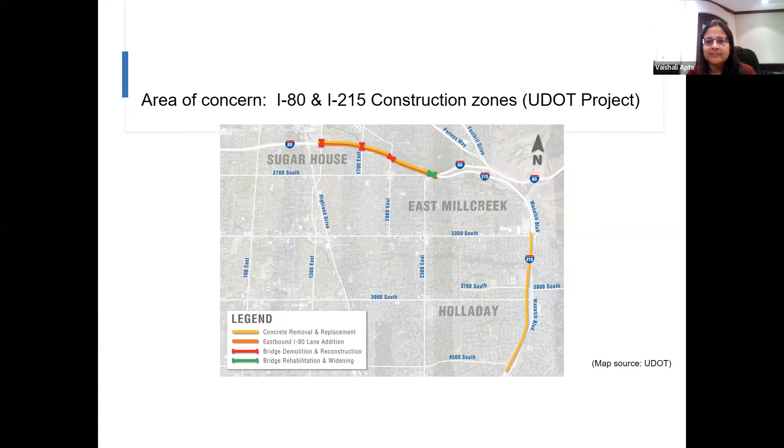This video is taken around noon, but during morning rush hour, evening rush hour, when it's darker, it's a lot harder to see.

This is just a quick summary of some of the important factors making this dangerous. Speeding in the construction zone - there's a lot of signage that the construction zone is 55 miles per hour, but drivers are traveling much faster than that. There's insufficient lighting.

There's really no lighting on the main line, it's mostly just at the ramps. We talked about the geometry of the road, the darkness, the fact that there's no reflectors, because reflectors which are used in places like Florida would just get scraped off by snowplows. Also, I think this particular area - and I've only been here for part of one winter - seems like it's a transition area between rain to snow, and it's just very hazardous.

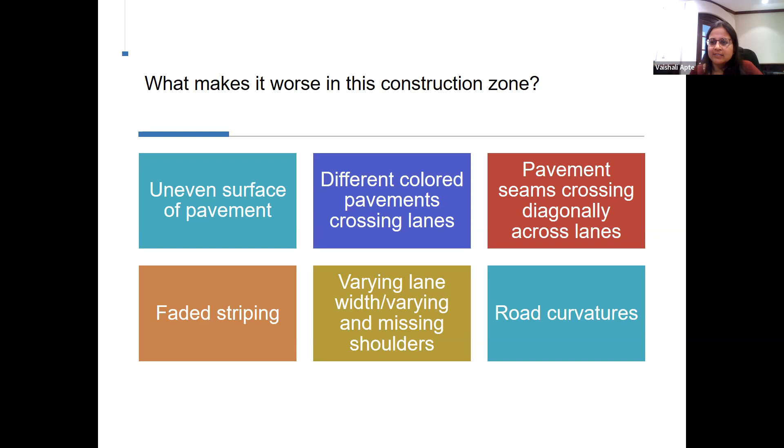Another example. So why is this such a big safety problem? Just a couple of weeks ago there was a pretty major crash, lanes were closed. This area is obviously dangerous for drivers if there's a crash, but it's right next to where a lot of workers are in the construction zone. That's extremely dangerous - there's just a concrete barrier separating them from the moving traffic.

The other thing is, I think a lot of cars - my car doesn't do this, but I think a lot of cars are starting to use lane sensing technology. I don't know how they're able to sense the lanes when you can't even see them. There's a lot of talk about future technologies for autonomous vehicles, and if they can't detect where they are, that's not going to work.

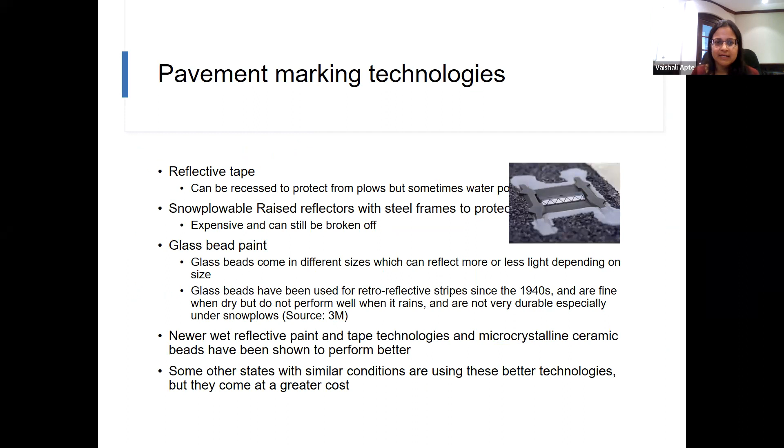These are just some different types of technologies - tapes, reflectors, different types of beads that are used. There is a study underway, a 3-year study that UDOT started last year, where they're looking at the different types of striping.

The I-80 and 215 project is scheduled to be completed late 2023, so this study won't be done by then. I strongly suggest they use whatever early results they have and implement them instead of waiting for the study, because by then construction will be done and it'll be too late.

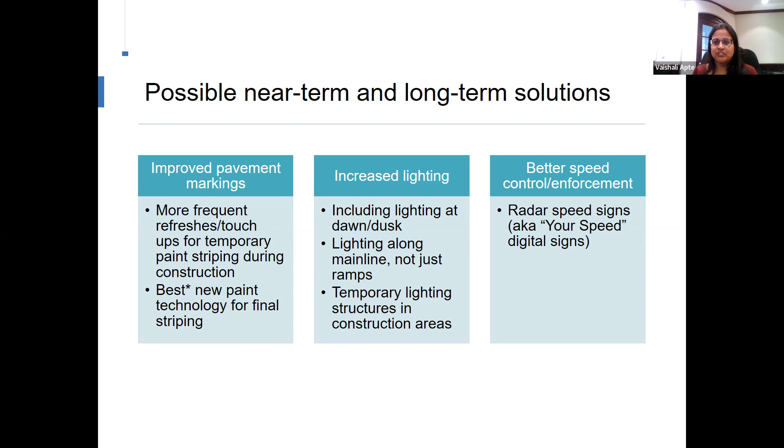So just to summarize the solutions: more frequent refreshes and touch-ups using the best possible technology for the final striping, increasing lighting across the whole roadway, not just the ramps, maybe putting in more temporary lighting, and also some better speed enforcement. Those are my suggestions. Thank you.

Very different project. This is one of the great things about these projects, the diversity of ideas. So GJ, I know you have at least an engineering background. Do you have some thoughts about this particular project you can share with us?

I do. The texture, which I assume means the profile of the roadway under construction, grabs the inside of your tire and kind of startles drivers. It's key, especially if you're an insecure or new driver, and then you've got people coming at speeds way beyond the construction zone limit. I think that's a key part of this. The autonomous vehicle suggestion, that everybody seems to think is the solution for the world, you know, the Elon Musks of the world - but there's never a roadway that's not under construction at some point.

And so if the autonomous vehicle technology doesn't take advantage of that, it's worthless, the automated drivers.

My last one was, do you know anything about how effective the fines are, doubled for speeding in construction zones? There's signage that says fines are doubled, and I drive this route back and forth twice a day because I drop my son off for school, and everybody is speeding. I have never seen anybody getting pulled over. I saw somebody pulled over once, but the highway patrol person started following them on I-15, way before even getting onto the construction zone.

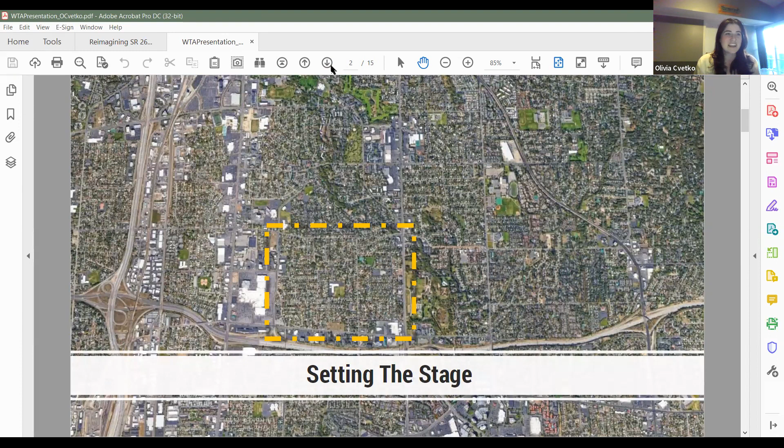So here is that same view, but I'm just pointing out a few key things in the area. You can see it's got a regional shopping center on the west side, Fashion Place Mall, lots of commercial running north to south, some commercial along I-215. There's an elementary school within the boundary, and on the east side is Wheeler Farm Regional Park, run by Salt Lake County, which is a great amenity for anyone who lives in the area. I love it. Next slide.

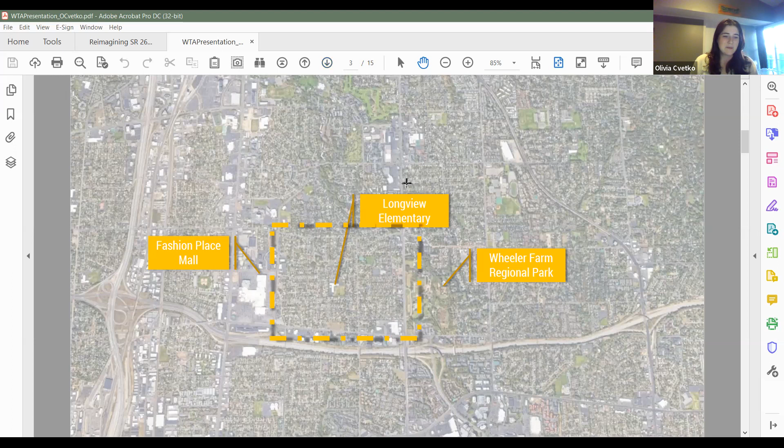Before I dive into the issues, I want to talk about who lives in this neighborhood. People in this census tract spend on average 22% of their income on transportation, which is about average for the Salt Lake area - a little lower than the greater MPO, Wasatch Front Regional Council, who spend about 49% on housing and transportation combined, where this area spends 45%. But only about half of households in the city live within a 10-minute walk to a park, compared to about 70% in Draper and 60% in Bountiful, some nearby comparable cities.

Next slide. Okay, and lastly, I wanted to give a little snapshot of who lives in the area - what's the demographic like?

So you can kind of see the neighborhood drawn in the top left corner. I think the key stats here are that the at-risk population list shows households with disability, population over 65, and households with no car. I'd also like to add into that list, for the purposes of my presentation, that chart on the bottom left, population under 18.

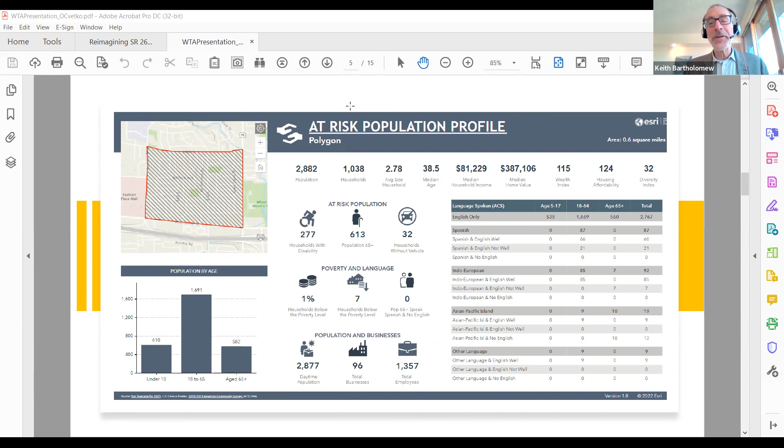I know this is amazing, but you're at 5 minutes now. Okay, all right, I'll go through a little quicker.

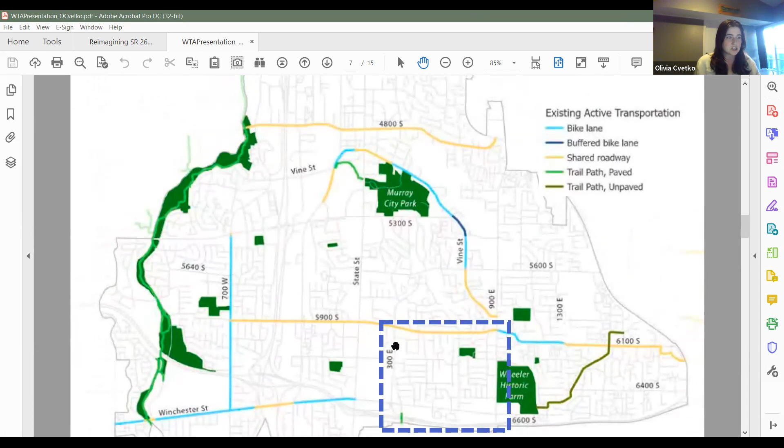So, current conditions, we can go to the next slide here. I moved to this neighborhood with dreams of Sunday walks to get boba tea at the mall and adventures at Wheeler Farm. As a new mom, household with a little baby, it's a little scary to cross some of these roads. So you can see here, this is a map of existing active transportation—not much in the project area.

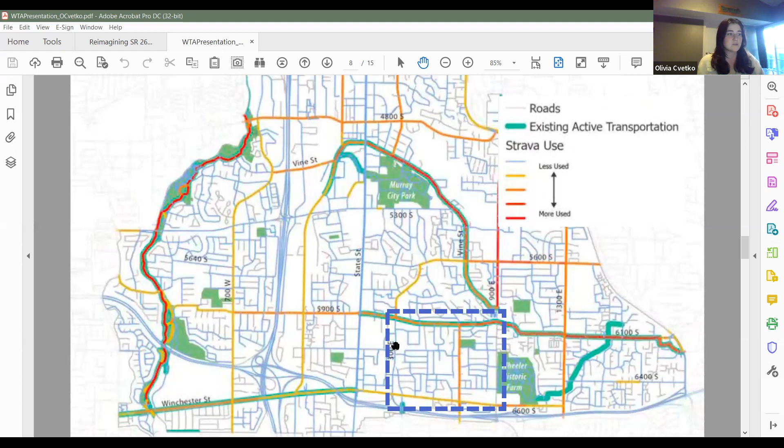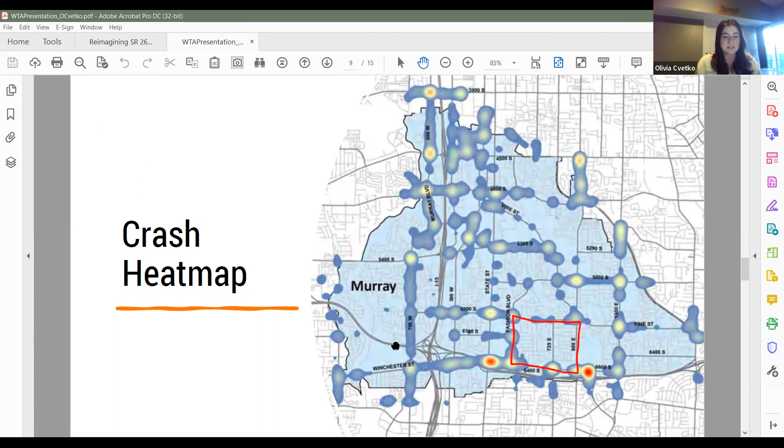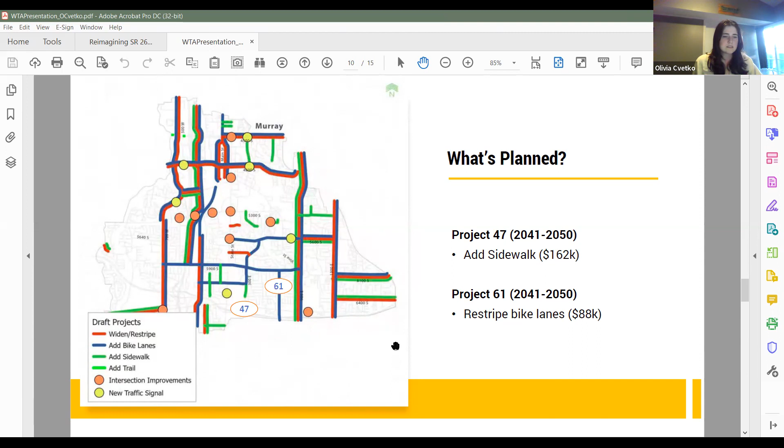So next slide, I wanted to point out what the city is planning. Murray just did their 2019 transportation plan, which unfortunately I didn't participate in because I didn't live here quite yet. There are 2 projects in the area planned for about 2050, so pretty far out—a new sidewalk on that little green stem by number 47, and restriping bike lanes through the middle of the neighborhood.

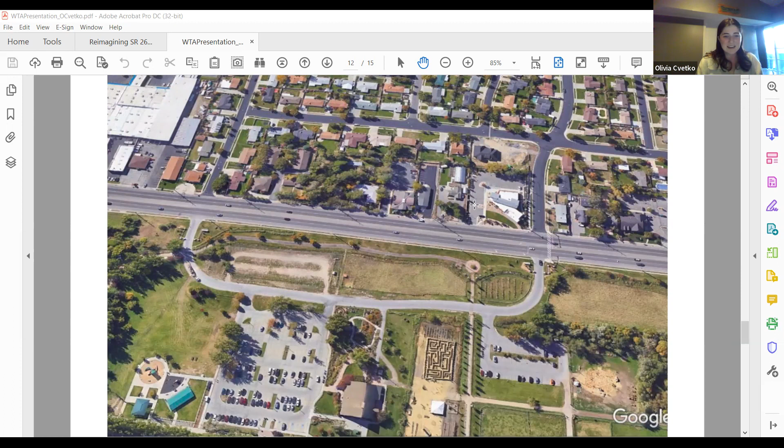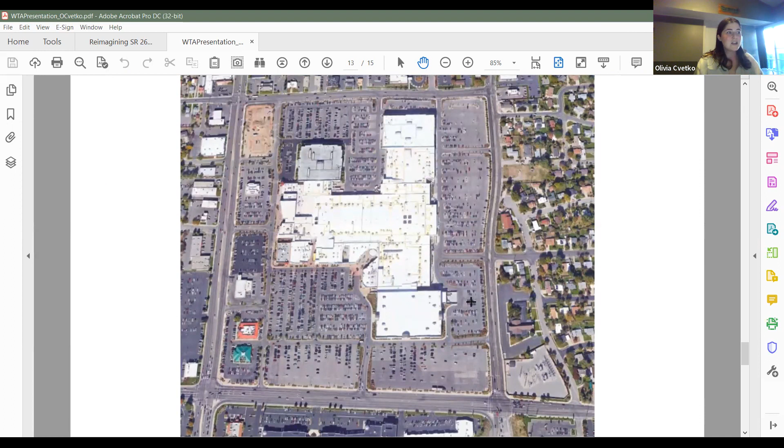Here is Fashion Place Mall. You can see my neighborhood on the right, Fashion Place Mall on the left. That access point in the middle is frequently used by a lot of my neighbors—there's always little old ladies with their purses walking across this very scary road, no crosswalks in sight. And if you go to the next slide, you can actually see that there are sidewalks around the perimeter of the mall, but they don't even dip into the mall. They have all this beautiful landscaping, but it's not very safe. So that's my trouble with all these great amenities that are not very accessible.

Some of the barriers to accomplishing this: one that's not listed is that the city just did their transportation plan, and those items are not listed in it, unfortunately. Another one is UDOT-owned right-of-way can be a serious challenge, including coordination between city, state, county, and private property owners with stakes in parking, right-of-way, all of these things. Funding is a big issue—if any of you saw on my slide showing planned projects, they were pretty pricey just to add a sidewalk and restripe bike lanes.

Funding's always an issue, and of course, loss of our precious parking space, taking up space for people who want to walk to the mall or around the mall. And that is my conclusion.

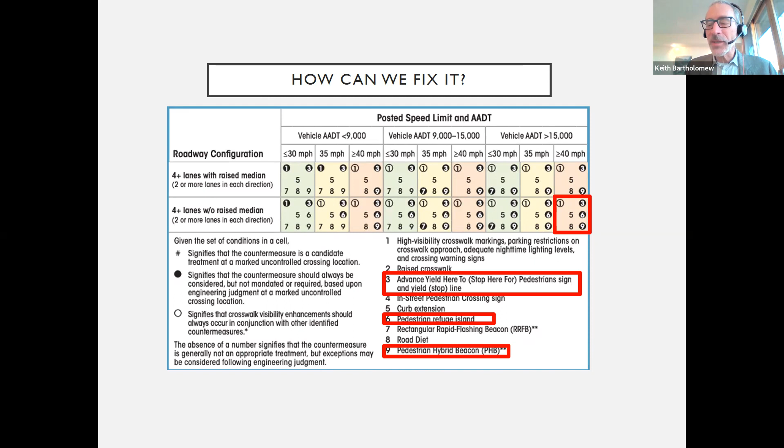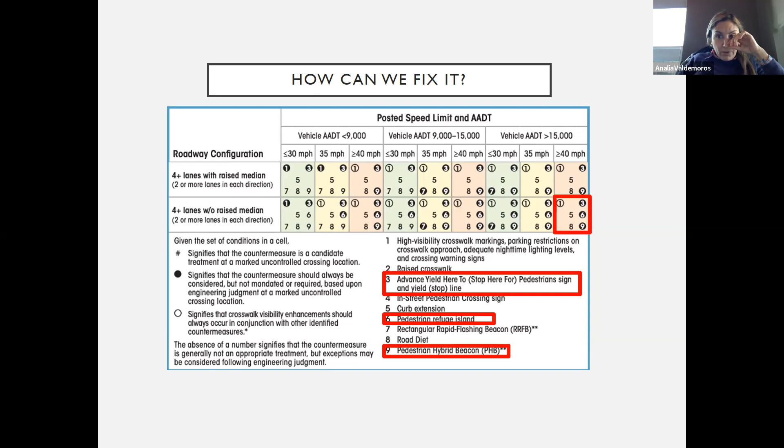Councilmember Valdemoros, this is your district. Yeah, it's in my district. I used to walk that intersection when I wasn't a planner. I used to live on 7th East and 3rd South, so I used to go to that corner quite often. I didn't have a car when I was a student. It hasn't changed, obviously, and that was 15, maybe 18 years ago.

I don't know how much it costs for that light timer, but we have Tom here, he might know. And hey, budget season is coming up, Tom, so you can always put in a request that we do that.

The council is interested in reducing speed limits in general in our city because of this very reason. Obviously, you mentioned this is not a city street, but regardless, whatever we can do, I'm happy to lobby the rest of my council members to support something like this, because that intersection is tough.

There's also a lot of elderly people living in that area because of those apartments, so it would help. I actually asked people if they drove at all, and about 30 to 40% of my results were people who didn't have a car or didn't drive. A lot of them were students, but a lot were older people as well. Tom, I don't know if you have a number you're familiar with, but that's my offer to you.

Olivia, thank you for making it so simple, but thorough and understandable. It's an easy sell, at least for me. Yeah Olivia, I'll put something in the chat for you.

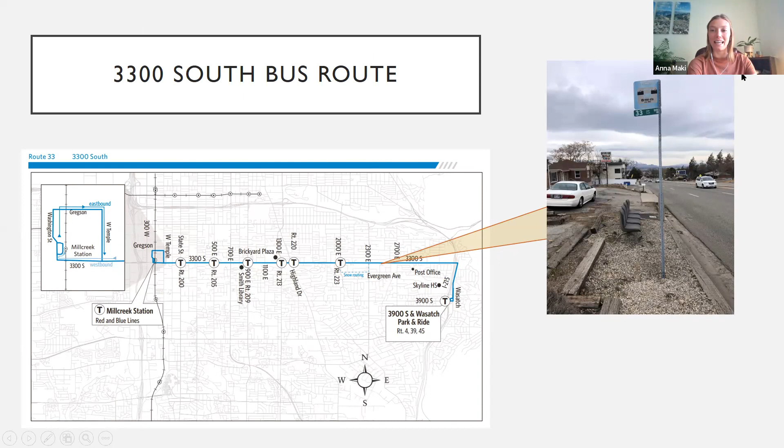Next slide, and these videos you can go ahead and play them. This first one, oh okay, the second one shows me walking east away from the bus stop. There's no separation from a lane of traffic. I promise I did not stop in the middle of the road. This one shows me walking towards the bus stop. Both show really good examples of how inaccessible this location actually is, and this is a pretty extreme example. Not all the stops are like this along 3300 South, but it shows that this is not ADA accessible. It's not accessible for people with strollers, and it's not even accessible for individuals who are uncomfortable with that low level of separation from traffic.

Next slide please. So Millcreek has a couple of master plans that actually address wanting to have better connections for all modes of transportation. They have the city center master plan, their general plan, and the transportation plan.

Even though they address a desire to support all modes of transportation, the only strategy they really put forward is bus stop amenities, such as seating and lighting, which is valuable, but it doesn't actually get individuals to the bus stop safely.

Using a couple of recommendations based off of the Life on State project, UTA, WFRC's connectivity guide, and various other resources, I came up with a couple of strategies that would work really well in this area.

Mid-block crossings with HAWK beacons, those are the ones that stop traffic in each direction. Pass-throughs are pedestrian walkways through neighborhoods that shorten connections to destinations. Wayfinding signage, curb extensions, that's the picture in the lower right hand.

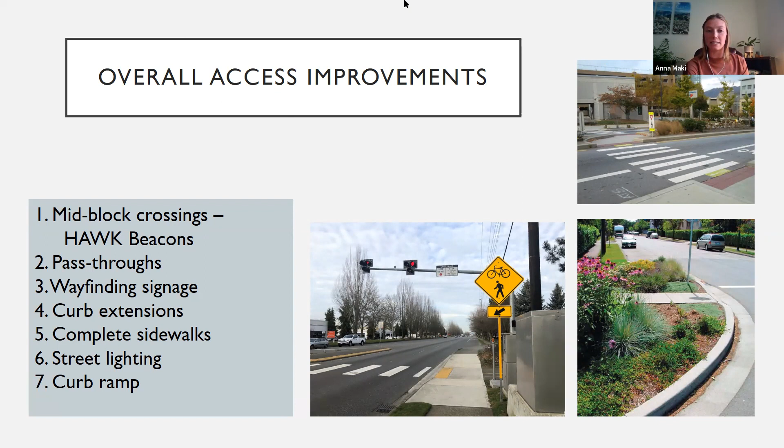One of the spots that could use one of these recommendations is the Smith's on 3300 South. There's a bus stop located right next to the McDonald's, shown in the picture on the right-hand side. There's an existing crosswalk from the neighborhood on the south side up into that commercial area that's heavily used, including an REI, but there's no crosswalk from where the existing crosswalk drops you off to the actual bus stop itself.

This is also an area with fairly high usage. In February of this past year, 22 individuals boarded at this location and eight individuals left. So not only do they have no place to go once they get off, they don't really have access to those businesses. I'd recommend putting in a pedestrian pathway, even if it's just a colored pavement type pathway, to get to Smith's and those other commercial businesses.

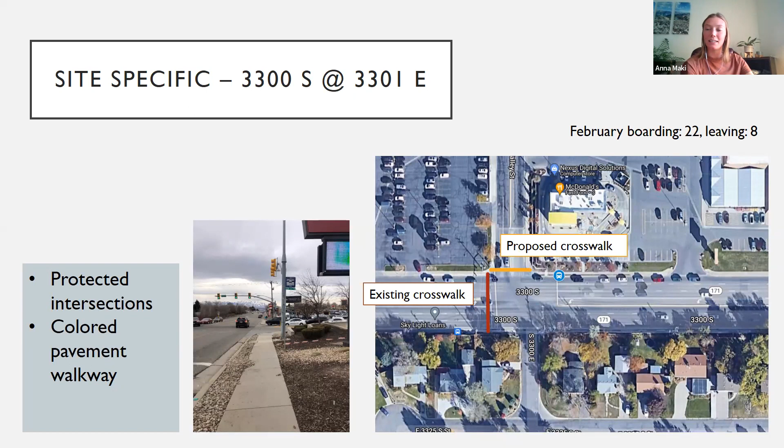Another example is a spot along 3300 South that doesn't have a sidewalk, and that's probably shown by the really low February usage. There were zero individuals who boarded in February and January, and one individual alighted at this location, which is interesting because it's surrounded by a lot of neighborhoods.

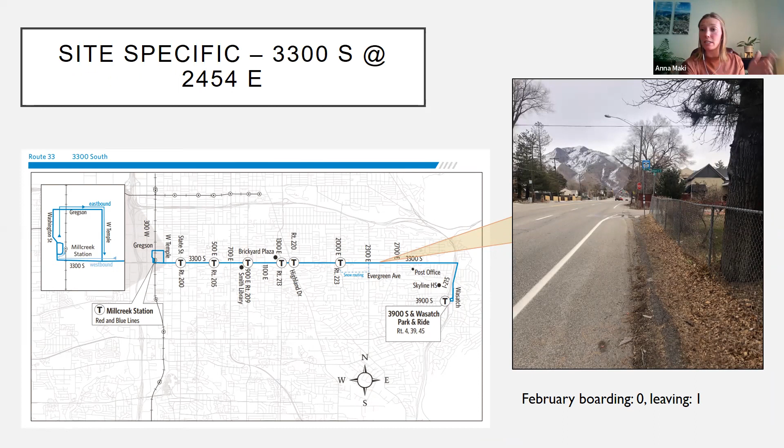My recommendations would be to put in a sidewalk and multi-use path just for general safety. Also a cut through, hard to see in that picture on the right-hand side, through the north neighborhood, which would provide faster access to 3300 South.

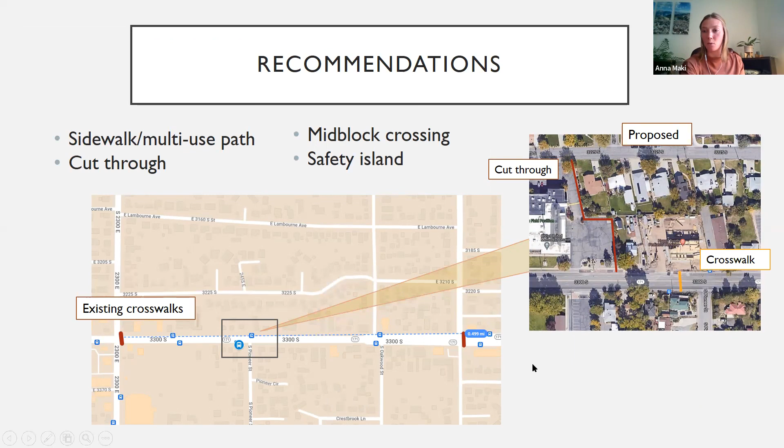And then also a mid-block crossing. There are existing crosswalks on 3300 South that are about a half mile apart, so if an individual is on the south side of the neighborhood and wants to board on the north side to head west, they'd essentially have to walk a half mile to get across the road safely.

My proposal for strategies and next steps would be for Millcreek to add network connectivity tools to their master plans in a way that ensures they actually move forward with them. There's also further research needed on pedestrian movement in Millcreek so we can better understand which areas are high usage and where people are going and coming from, so we can support the infrastructure for that. And finally, to actually implement, plan, and design policies throughout the city to be included in future projects.

And that's everything.

It makes me so, I don't know, angry sometimes, imagining what it's like to be there as a human being as opposed to something in a vehicle. So, yeah. GJ, this is kind of your turf.

What can we do to help Anna get her and her neighbors to the number 33 bus?

Okay, let me finish my notes on the group here. It was amazing.

Anna, this is actually an active project. We have federal funding for this, to improve the corridor from the TRAX station to Wasatch Boulevard. I don't know if you saw my other note, but Laura Hansen lives a little further east from the Wasatch Boulevard end of things, and her daughter walks across the freeway down to the McDonald's and has had personal experiences with this particular area. But if you reach out to me, I will personally put you in touch with some of the people doing the work along this corridor.

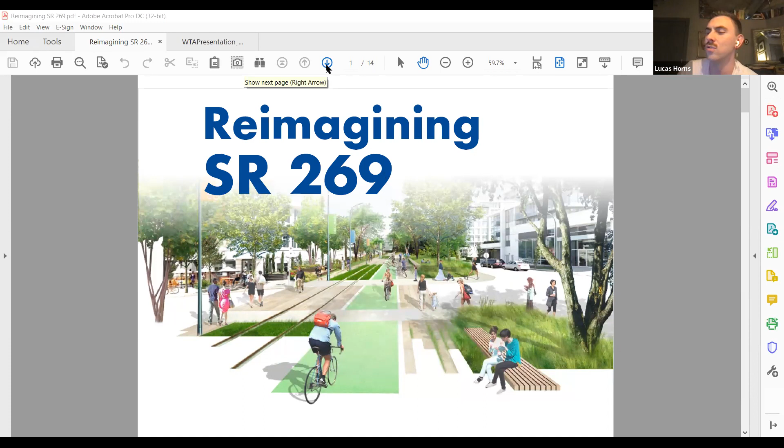So the two of these streets combined are kind of a highway to funnel traffic in and out of downtown onto and off of I-15. They're 120 feet wide and 6 lanes of traffic wide in some places. They're really, really efficient and good at getting hundreds and thousands of cars onto and off of the freeway, but they're really horrific for just about everyone else.

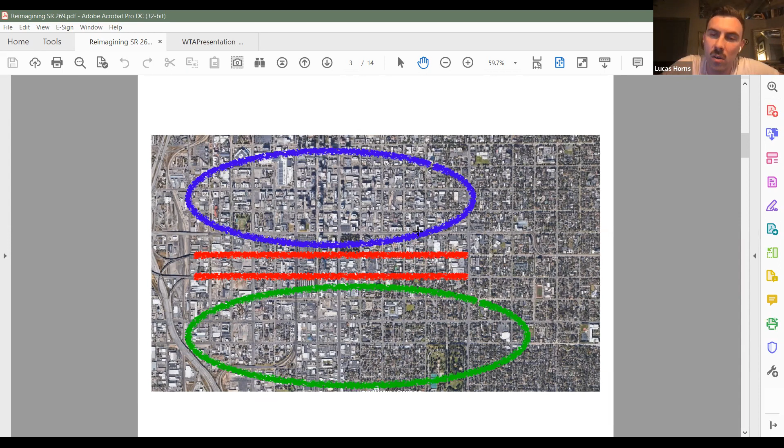Next slide, please. So here's a map of where you can see 500 South and 600 South kind of cutting all the way across the city. They really serve as a kind of psychological and physical barrier, blocking up downtown and these residential neighborhoods to the south. So it really erodes the walkability of our city and prevents people from living in neighborhoods like Central Ninth, Ballpark, and Liberty Wells from being able to safely and comfortably walk or bike to and from downtown.

Next slide, please. So wouldn't it be great if this looked more like, next slide, this? So how do we get there? Next slide.

So I'm proposing that we dig out a trench where the streets are now and lower the cars below grade. And at grade level, put linear parks down the middle of the streets, with really calm single lane traffic kind of flanking the sides of the parks.

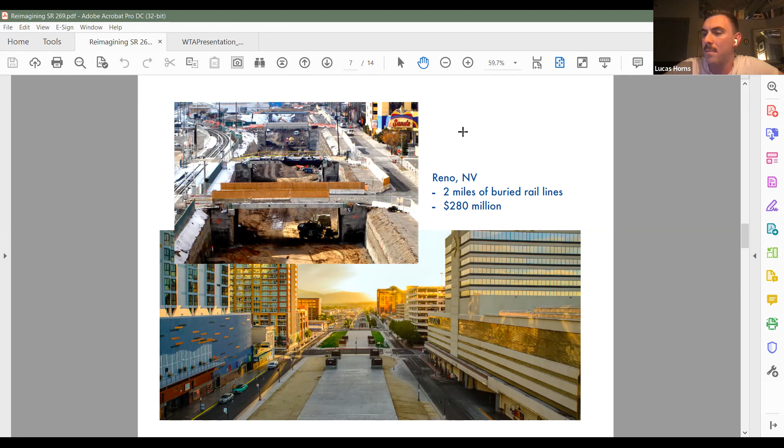Next slide, please. This is not super unusual or unthought of. Here's an example in Reno, Nevada, where they did the same thing to rail lines that cut through their downtown. You can see they just dug out a trench where the rail lines were and lowered the rail line down, and now they have a park going through their downtown instead of rail lines. This also isn't unlike the proposal for the rail yard behind the Rio Grande station, and it's comparable to other things, like someone mentioned SLC's Big Dig, similar to Boston's Big Dig. This isn't the first time this would happen.

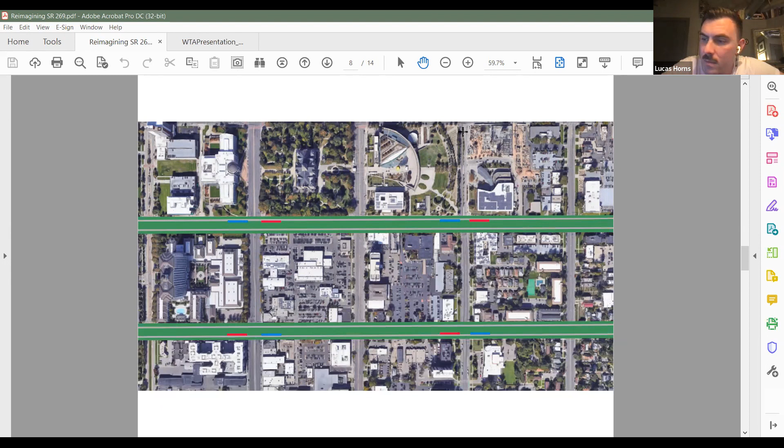This isn't super unusual even for Salt Lake City. You can see there are a lot of parking garages downtown with similar on and off ramps into the parking garages that don't really take up more than a single lane of traffic. So it wouldn't have to have a huge footprint next to these parks.

Like I mentioned earlier, these streets are titled Martin Luther King Jr. Boulevard and Cesar Chavez Boulevard. By turning them into long greenways, it's an opportunity to better honor these leaders and instill public art and events to honor them better as well, better than streets no one ever walks down.

So often we think of active transportation projects as opposed to cars, but this one would be even better for cars. Cars wouldn't be stopped by traffic lights every block. They could flow freely underground, unbeknownst to the world above.

And this is something UDOT really does have to consider, because as Salt Lake grows, they're going to have to figure out a way for these streets to work even more efficiently than they already do. If you've ever tried to get onto I-15 at 5 or 6 p.m., 500 South is already getting blocked up light to light. So this is a worthwhile project simply from a traffic standpoint.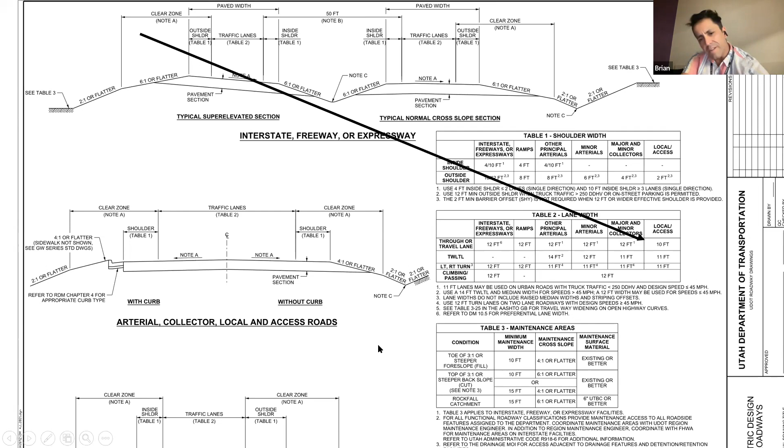We can go to the next slide. I know it can be done - I've looked at UDOT's cross section of traffic lanes and their width. It does say you can get it down to 10 feet, right there on the right hand side. This is the lane width on a local access road. They don't put a lot of literature or narration on it, but anyway, about a 10-foot road.

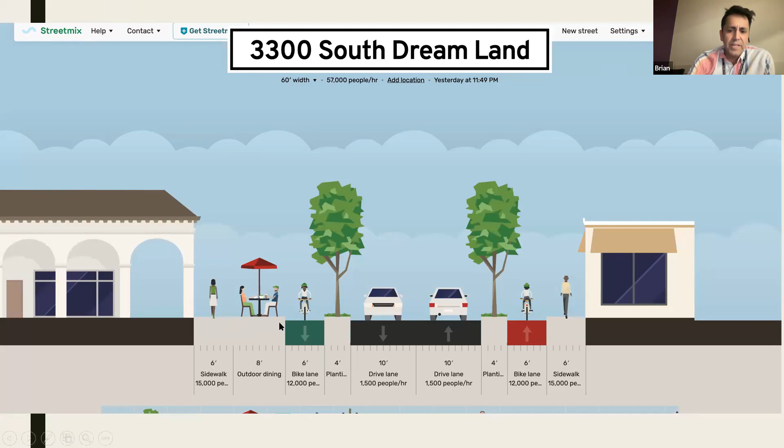But going back to my dream, just my ideas for that area - I got the idea from a presentation that was shown to me. Here you have wide open 3-car lanes in each direction, a meandering sidewalk that goes off to nowhere, a utility corridor with green space. But I thought maybe some spearheading of grand boulevards like this, where you'd put trees down the middle median, then add some people, sidewalk, make it a little more - as I think it pretty much explains itself.

So, back to it. This is just showing existing conditions, which we prefer. It ties into pretty much everywhere else.

Where to go next would be doing more homework on this project. I've discussed this with some engineering firms. They were not too happy about 10-foot travel lanes, and they were concerned about all the utilities on the side of the roads. But this would be my next potential step, to look at what kind of plans already exist.

I know there's an existing Mill Creek transportation plan that was mentioned earlier, Anna I believe mentioned it. I'd meet with some local plan engineers. I know the Mill Creek Center plan calls for a boulevard here, on your left-hand side. I'm just kind of throwing ideas on the wall to see if they stick, and figure out where this transportation idea would work and where I go next.

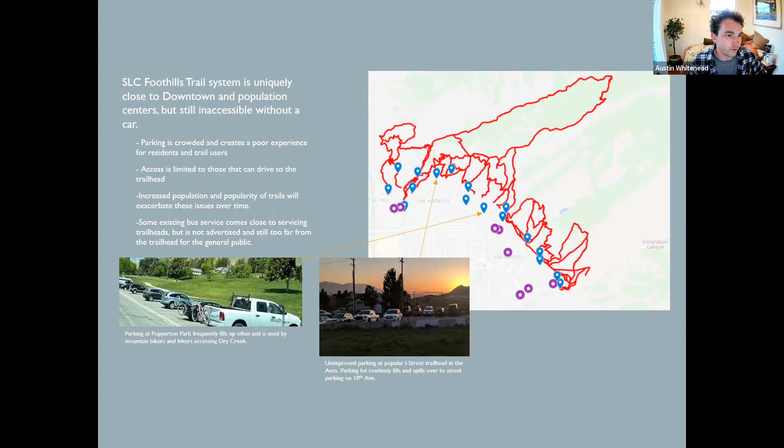The two stops I think are most compelling as transit trail stops are the Capitol stop—you're within a half mile of Hell Canyon and Memory Grove, about a mile to City Creek. Unfortunately the 200 doesn't run all the way to the Capitol on weekends, which is when most people might use it for trail service.

And then the U of U hospital stop services tons of neighborhoods. It's got 3 high frequency routes running up to it. You're less than a half mile to the Dry Creek Trailhead, and you can also access the Bonneville Shoreline Trail and Red Butte. But the wayfinding, especially with the construction up by the hospital from the bus stop to the trailhead, is pretty intimidating and not great.

And then the other thing I'll say is about accessing—if we can do one more click, or maybe two. Just one is good.

Another cool thing about accessing trails by transit is you can do cool link-ups and explore trails in different ways. These are two routes: the first links two stops on the 21 and explores the foothills around Red Butte, and the second links the Hogle Zoo lot all the way over to the 200. You couldn't do that in a car.

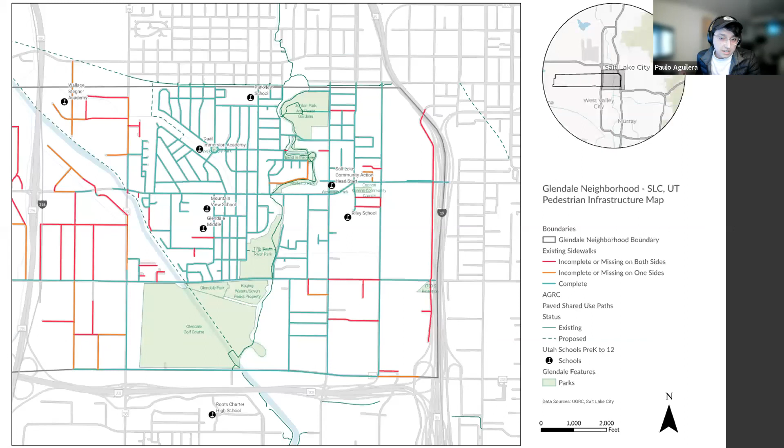Next slide. There are equity focus areas that WFRC and Salt Lake City have identified. WFRC, the way they create their composite scores, looks at three variables: low income, minority—they have the minority index—and zero car households. There's a West Side equity master plan that I'll share in the link in the chat with all of you, you can take a look at that.

They take it a step further. They look at the minority index, people living below the poverty level, linguistic isolation as a variable, households without vehicles, people over the age of 65 and under the age of 18, and people with disabilities.

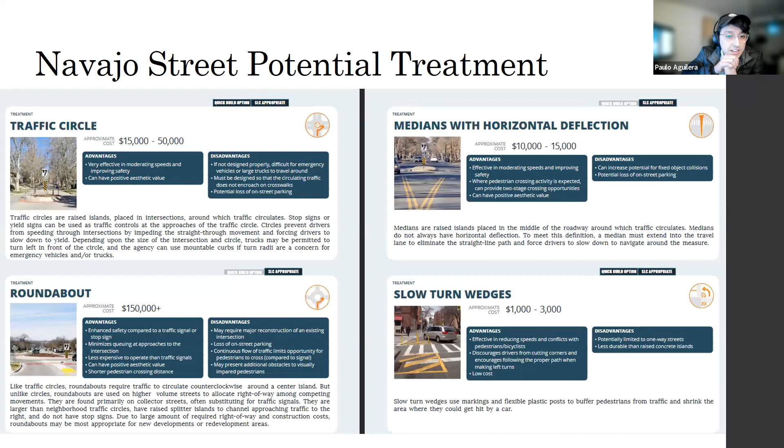We don't have a proposed design for this, but there are some potential treatments ranging from $1,000 up to $150,000 for what it would cost to implement some solutions here. These are taken straight out of the Livable Streets document that Salt Lake has on their website. We could go to the next slide—some other alternatives here, we can just keep going.

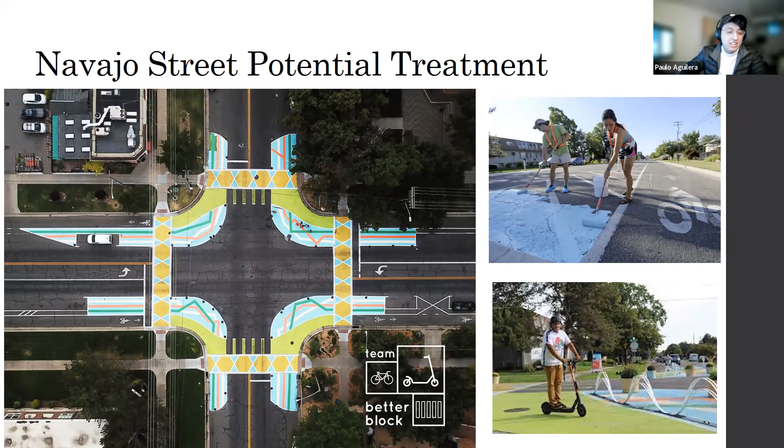The one thing we do want to achieve with this is to paint a mural close to what the spin space would be, but we also want to bring on help, like engineers, whoever could help us with this effort. I have one committed from Fehr & Peers to understand what the vertical elements would be, and what the actual cross sections and changes would have to be done here. But in terms of next steps, that's kind of it—identifying one solution that's low risk, low cost, but potentially high reward, and showing it as a prototype that does work.

And some of these communities that need more. All right, I'll shut up.

Bravo, excellent presentation. We spent some time over the past few weeks talking about how to conceptualize moving from a variety of different scales, to be very specific and detail oriented, but also to show that detail in a broader context and how it connects to a wider neighborhood and community. You guys have done that really beautifully. Excellent job. Council Member Valdemoros, what do you think?

Glendale Transportation Group, I think overall it's amazing. I wanted to say a few words for this last group. We created the Equity in Policing board as a result of the issues we faced in 2020, and I think it's picked up with the rest of the council members about equity, but not just racial equity in policing, but also physical equity and transportation equity.